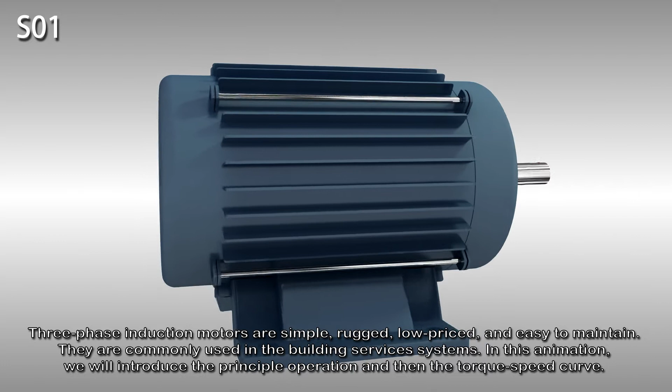Induction motor, principle of operation and the torque speed curve. Three-phase induction motors are simple, rugged, low-priced and easy to maintain. They are commonly used in building services systems. In this animation, we will introduce the principle of operation and then the torque speed curve.

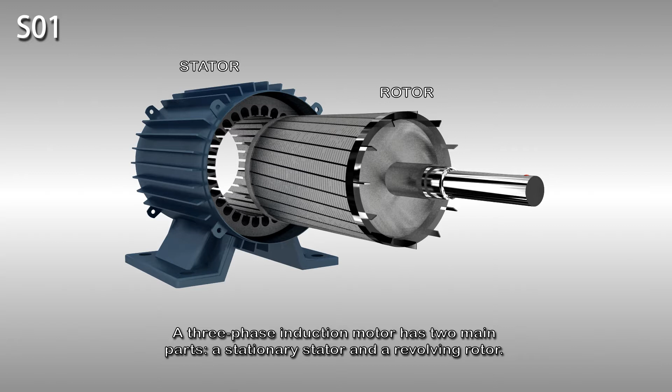A three-phase induction motor has two main parts, a stationary stator and a revolving rotor. The stator consists of a steel frame that supports a hollow cylindrical core made up of stacked laminations. A number of evenly spaced slots punched out of the internal circumference of the laminations provide the space for the stator winding. The rotor is also composed of punched laminations.

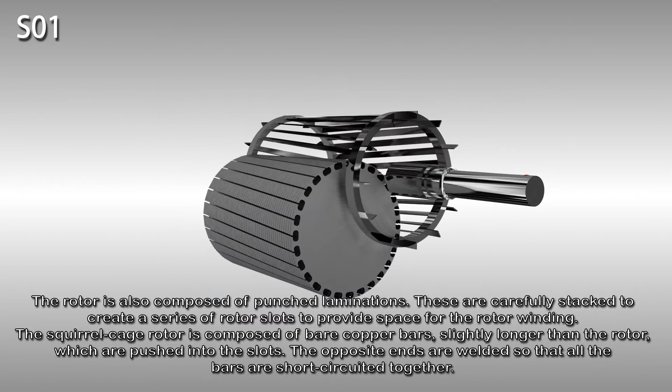These are carefully stacked to create a series of rotor slots that provide space for the rotor winding. The squirrel cage rotor is composed of bare copper bars, slightly longer than the rotor, which are pushed into the slots. The opposite ends are welded so that all the bars are short-circuited together. The entire construction resembles a squirrel cage, from which the name is derived.

When a three-phase AC current passes through the stator winding, it produces a magnetic field that rotates in time with the AC oscillations and penetrates the rotor. The rotor will start to rotate in the direction of the rotating stator magnetic field based upon the application of Faraday's law and the Lorentz force on a conductor.

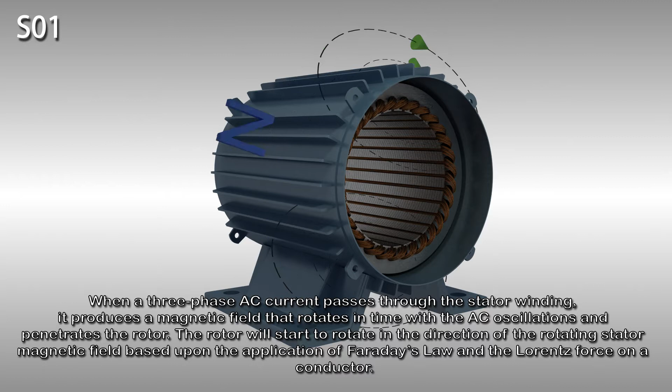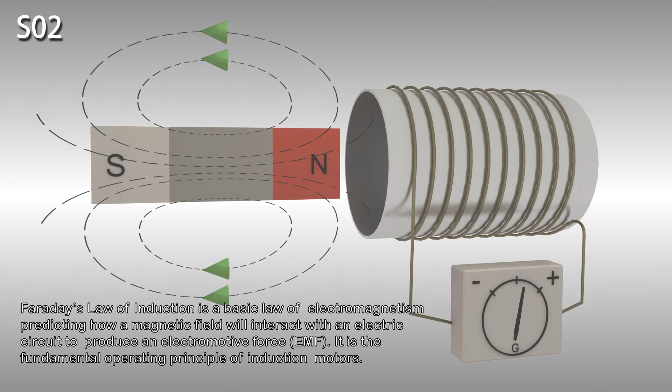Faraday's law of induction is a basic law of electromagnetism and predicts how a magnetic field will interact with an electric circuit to produce an electromotive force, or EMF. It is the fundamental operating principle of induction motors. In 1831, Michael Faraday discovered that any change in the magnetic environment of a coil of wire will cause an EMF to be induced in the coil.

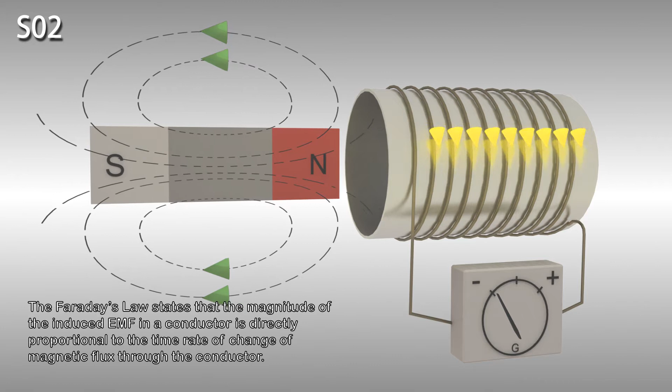Faraday's law states that the magnitude of the induced EMF in a conductor is directly proportional to the time rate of change of magnetic flux through the conductor. In other words, EMF is proportional to ΔΦ/Δt. Lenz's law is a qualitative law that refers to the direction of induced current in relation to the effect which produces it, without quantitatively relating their magnitudes. It states that the direction of the induced current will always oppose the inducing action of a moving magnet.

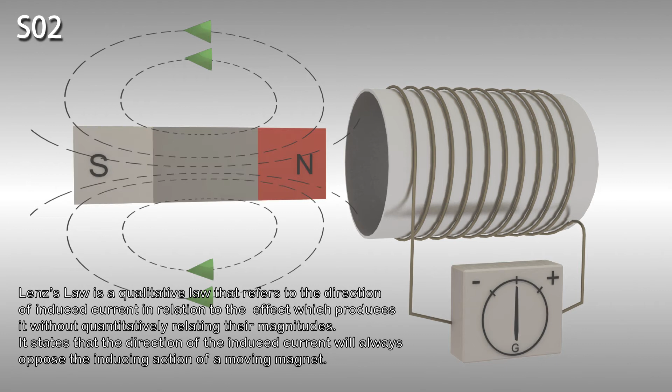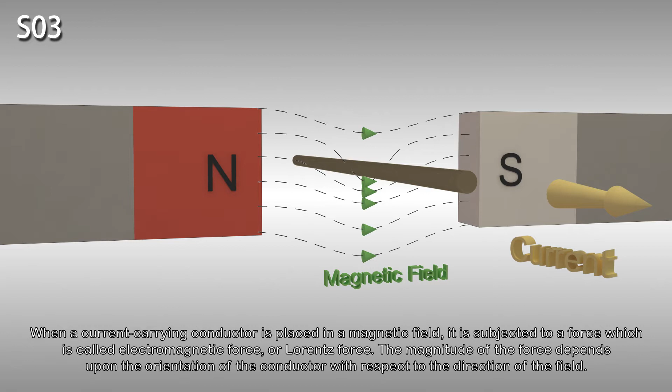When a current-carrying conductor is placed in a magnetic field, it is subjected to a force called the electromagnetic force, or Lorentz force. The magnitude of the force depends upon the orientation of the conductor with respect to the direction of the field. The force is greatest when the conductor is perpendicular to the field and zero when it is parallel to it. Between these two extremes, the force has intermediate values. The direction of the electromagnetic force can be illustrated by Fleming's left-hand rule.

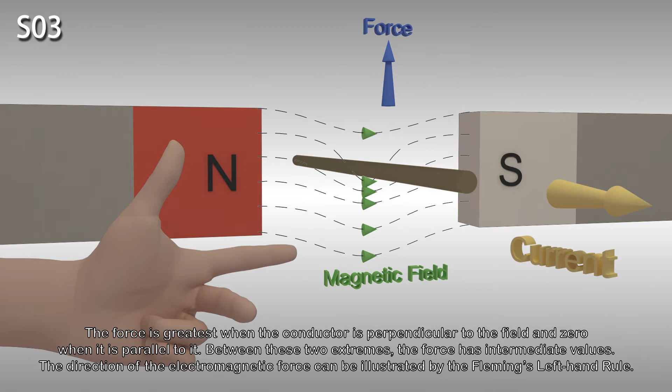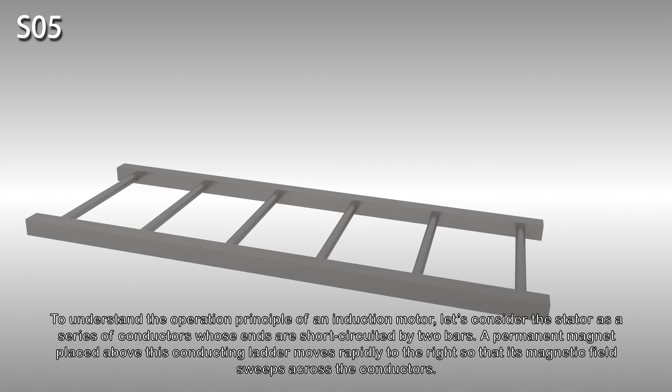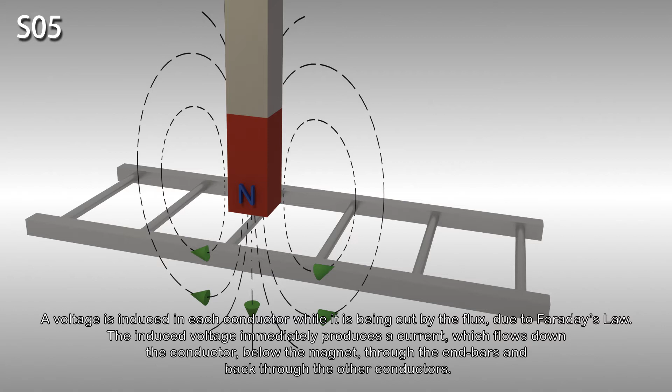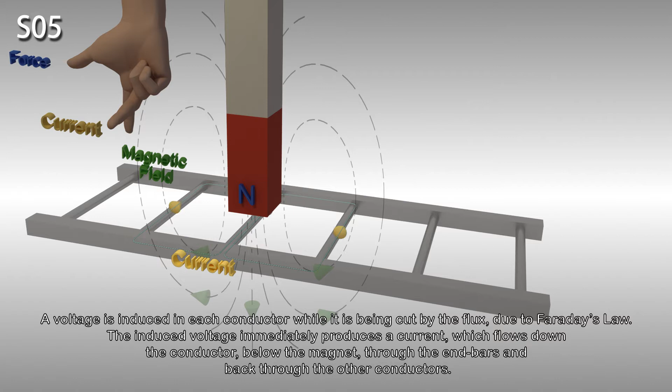To understand the operation principle of an induction motor, let's consider the stator as a series of conductors whose ends are short-circuited by two bars. A permanent magnet placed above this conducting ladder moves rapidly to the right so that its magnetic field sweeps across the conductors. A voltage is induced in each conductor while it is being cut by the flux due to Faraday's law. The induced voltage immediately produces a current which flows down the conductor, below the magnet, through the end bars and back through the other conductors.

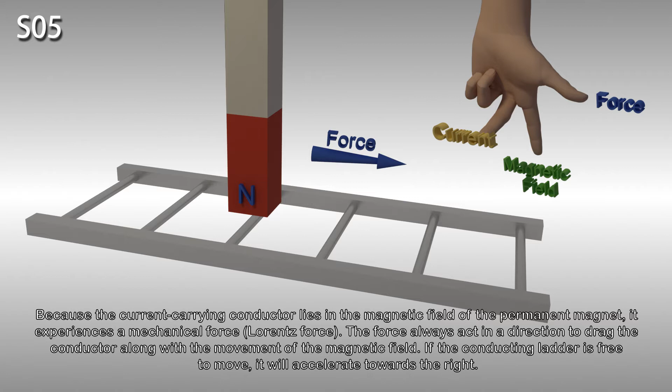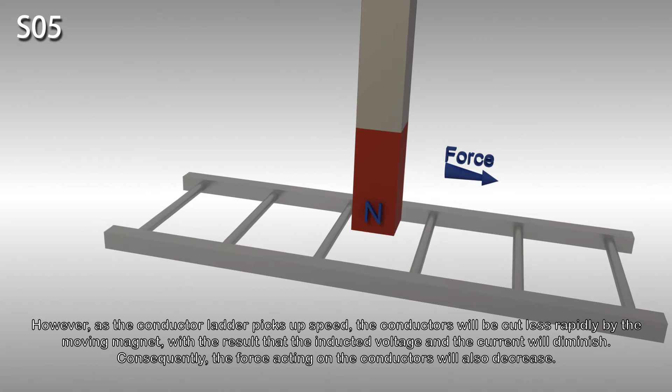Because the current-carrying conductor lies in the magnetic field of the permanent magnet, it experiences a mechanical force known as the Lorentz force. The force always acts in a direction to drag the conductor along with the movement of the magnetic field. If the conducting ladder is free to move, it will accelerate towards the right. However, as the conductor ladder picks up speed, the conductors will be cut less rapidly by the moving magnet, with the result that the induced voltage and the current will diminish. Consequently, the force acting on the conductors will also decrease.

In an induction motor, the ladder is curved to form a squirrel cage, and the moving magnet is replaced by a rotating field. The field is produced by the three-phase currents that flow in the stator windings.

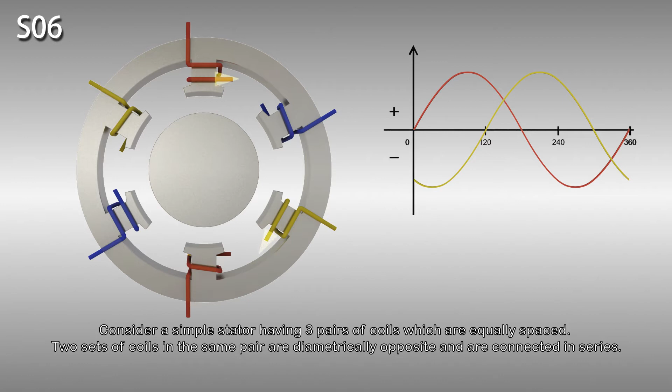The animation now explains the rotating stator magnetic field. Consider a simple stator having three pairs of coils which are equally spaced. Two sets of coils in the same pair are diametrically opposite and are connected in series. This creates three identical sets of windings that are mechanically spaced at 120 degrees relative to each other.

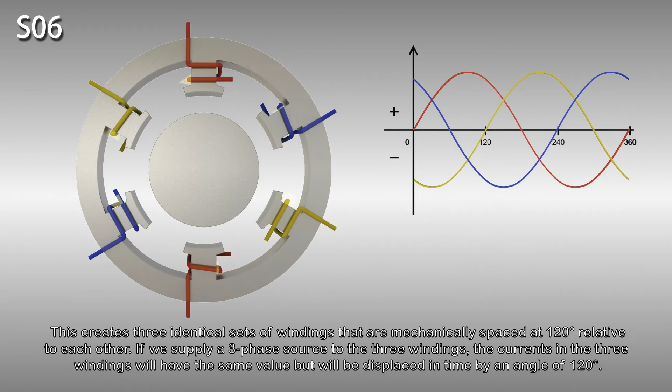If we supply a three-phase source to the three windings, the currents in the three windings will have the same value, but will be displaced in time by an angle of 120 degrees. During the positive half cycle of the R phase, the current will flow in this direction along these two windings. According to the right-hand rule, the magnetic flux is in the direction shown, creating north and south poles.

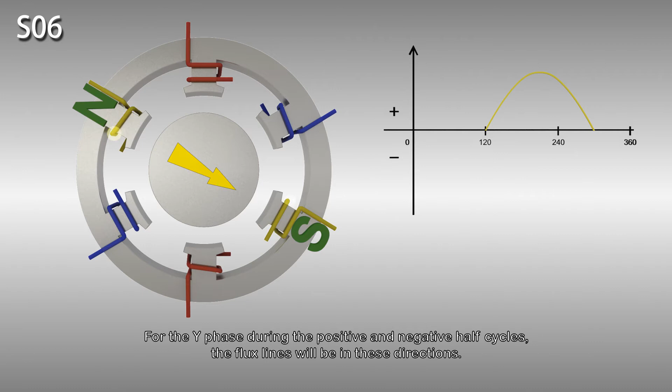In the negative half cycle, current will be flowing in the opposite direction. Therefore, the flux lines will also be in the opposite direction. For the Y phase during the positive and negative half cycles, the flux lines will be in these directions. For the B phase during the positive and negative half cycles, the flux lines will be in these directions.

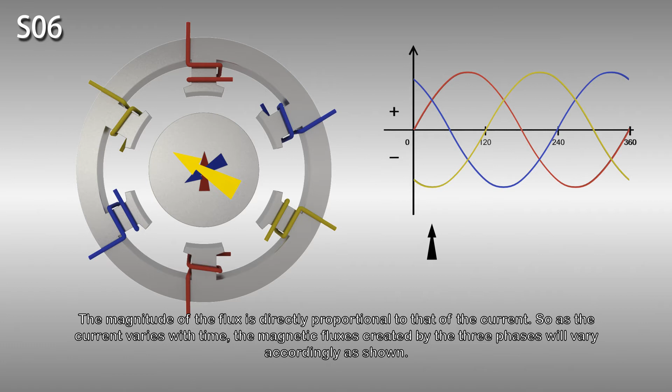The magnitude of the flux is directly proportional to that of the current. As the current varies with time, the magnetic fluxes created by the three phases will vary accordingly as shown. As flux lines can't cross each other, the three fluxes combine and produce a magnetic field having essentially one broad north pole and one broad south pole. This means this stator produces a two-pole field.

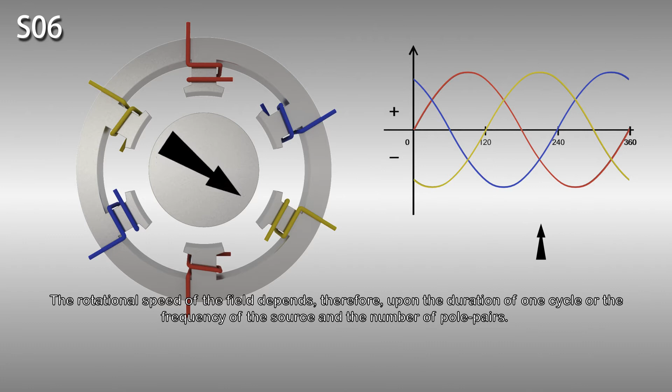The magnetic field rotates with time and makes one complete turn in one cycle of current flow. The rotational speed of the field depends therefore upon the duration of one cycle or the frequency of the source and the number of pole pairs. Because the speed of the rotating field is necessarily synchronized with the frequency of the source, it is called synchronous speed. If the frequency is 50 Hz, the resulting field makes one turn in 1/50th of a second, that is 3000 revolutions per minute. The synchronous speed can be reduced by increasing the number of pole pairs.

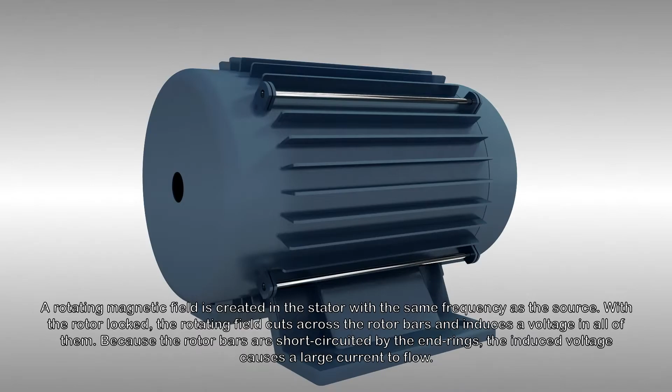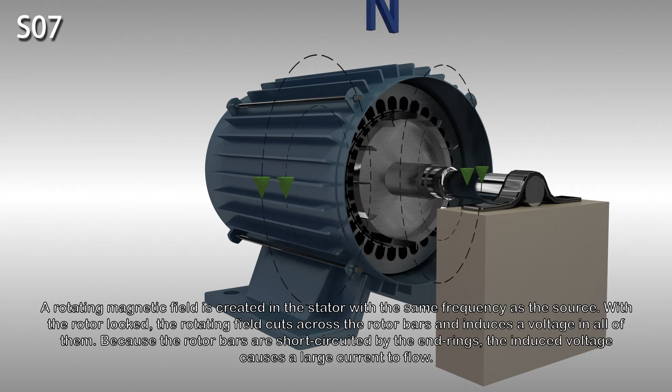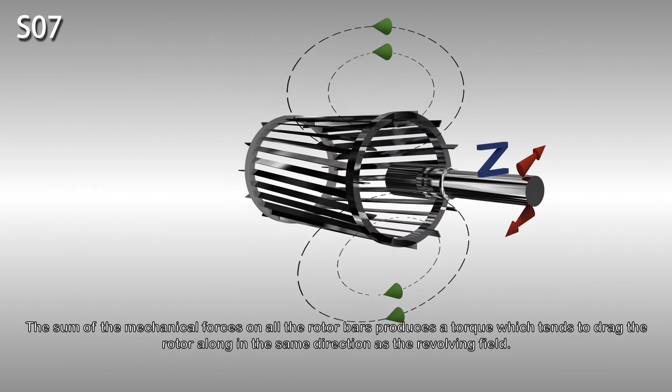A rotating magnetic field is created in the stator with the same frequency as the source. With the rotor locked, the rotating field cuts across the rotor bars and induces a voltage in all of them. Because the rotor bars are short-circuited by the end-rings, the induced voltage causes a large current to flow. The current-carrying conductors are in the path of the flux created by the stator. Consequently, they all experience a strong mechanical force. The sum of the mechanical forces on all the rotor bars produces a torque which tends to drag the rotor along in the same direction as the revolving field.

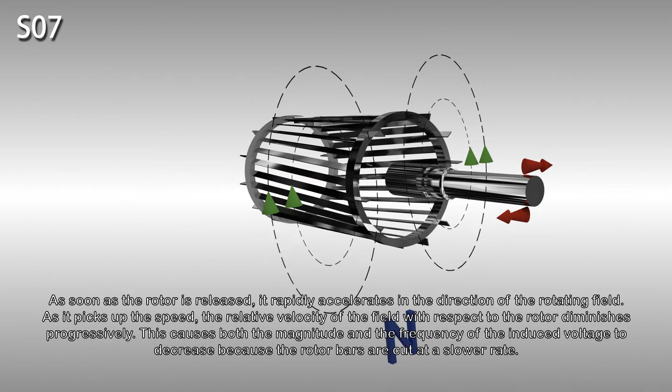As soon as the rotor is released, it rapidly accelerates in the direction of the rotating field. As it picks up speed, the relative velocity of the field with respect to the rotor diminishes progressively. This causes both the magnitude and the frequency of the induced voltage to decrease because the rotor bars are cut at a slower rate. As the rotor speeds up, it never manages to catch up with the revolving field.

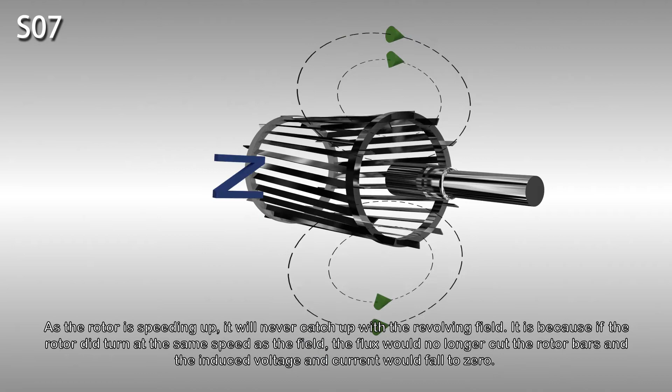If the rotor did turn at the same speed as the field, the flux would no longer cut the rotor bars and the induced voltage and current would fall to zero. Under these conditions, the force acting on the rotor bars would also become zero, and friction and windage would immediately cause the rotor to slow down. The rotor speed is always slightly less than the synchronous speed in order to produce a current in the rotor bars sufficiently large enough to overcome the braking torque. The difference between the synchronous speed and the rotor speed, expressed as a percentage of synchronous speed, is called the slip S.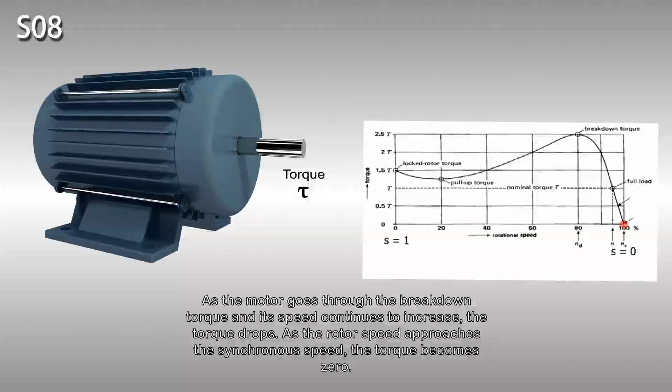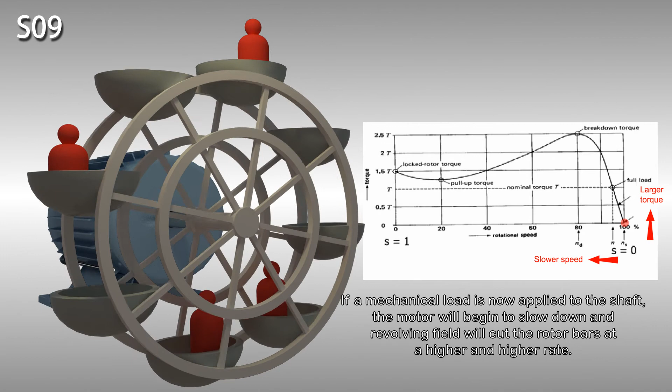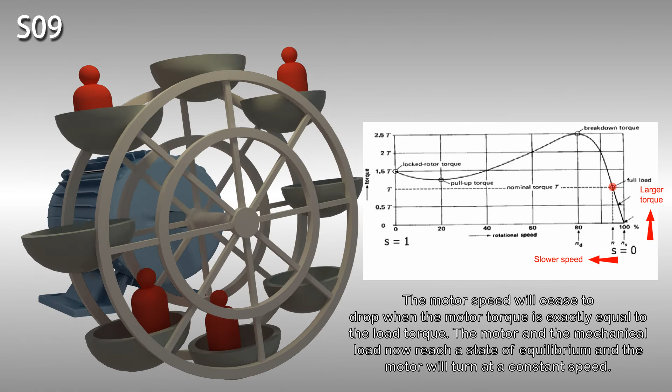If a mechanical load is now applied to the shaft, the motor will begin to slow down and the revolving field will cut the rotor bars at a higher and higher rate. The induced voltage and the resulting current in the rotor bars will increase progressively, producing a greater and greater motor torque. The motor speed will cease to drop when the motor torque is exactly equal to the load torque. The motor and the mechanical load now reach a state of equilibrium and the motor will turn at a constant speed.

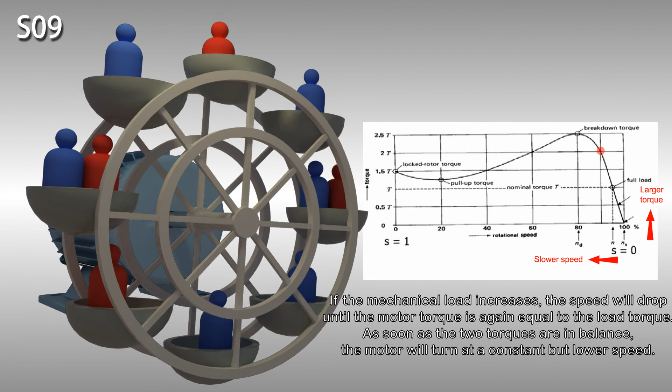If the mechanical load increases, the speed will drop until the motor torque is again equal to the load torque. As soon as the two torques are in balance, the motor will turn at a constant but lower speed. However, if the load torque exceeds the breakdown torque, the motor will quickly stop.

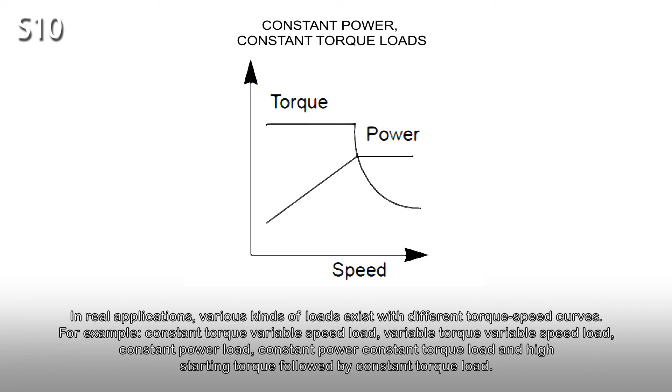In real applications, various kinds of loads exist with different torque-speed curves. For example, constant torque variable speed load, variable torque variable speed load, constant power load, constant power constant torque load, and high starting torque followed by constant torque load.

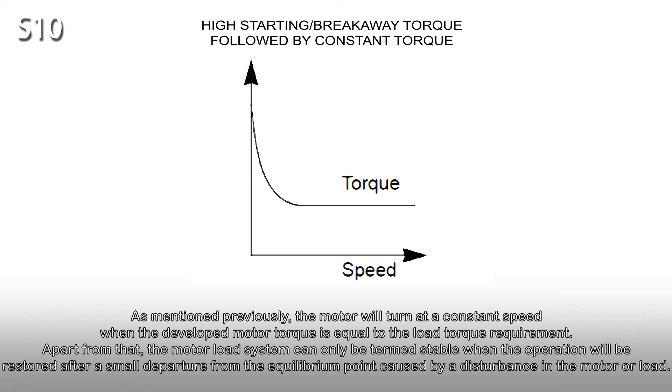As mentioned previously, the motor will turn at a constant speed when the developed motor torque is equal to the load torque requirement. Apart from that, the motor load system can only be termed stable when the operation will be restored after a small departure from the equilibrium point caused by a disturbance in the motor or load.

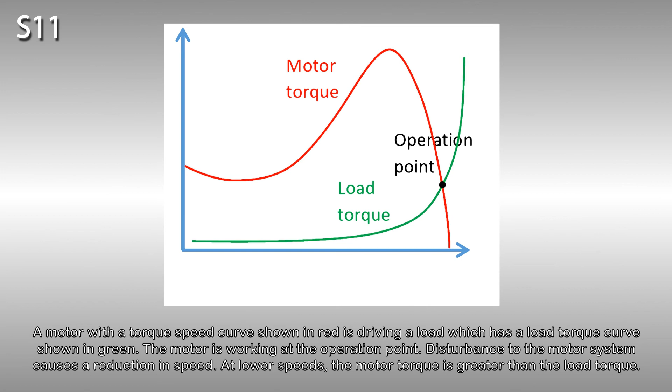A motor with a torque-speed curve shown in red is driving a load which has a load torque curve shown in green. The motor is working at the operation point. Disturbance to the motor system causes a reduction in speed. At lower speeds, the motor torque is greater than the load torque. Consequently, the motor will accelerate and the operation will be restored to the operation point.

Similarly, an increase in speed caused by disturbance will make the load torque greater than the motor torque, resulting in a deceleration and restoration of the operation point. Hence, the system is stable.

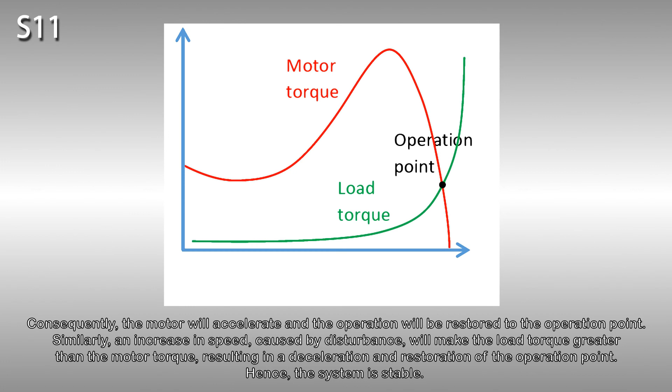A suitable motor should be selected for driving the given load. Various standards exist which specify various operating and constructional parameters of motors. One of the most widely used standards are those of the National Electrical Manufacturers Association, or NEMA. The NEMA standards mainly specify 4 design types of AC induction motors, designs A, B, C and D.

Design A has normal starting torque and relatively high starting current. The breakdown torque is the highest of all the NEMA types. It can handle heavy overloads for a short duration. A typical application is the powering of injection molding machines.

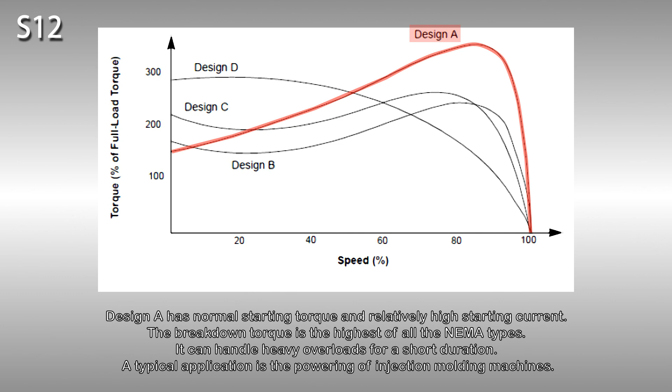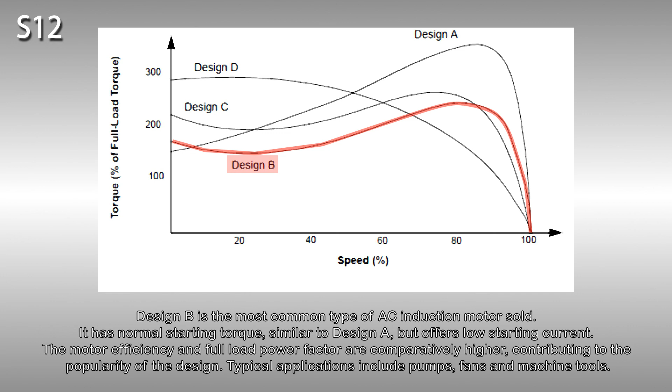Design B is the most common type of AC induction motor sold. It has normal starting torque, similar to Design A, but offers low starting current. The motor efficiency and full load power factor are comparatively higher, contributing to the popularity of the design. Typical applications include pumps, fans, and machine tools.

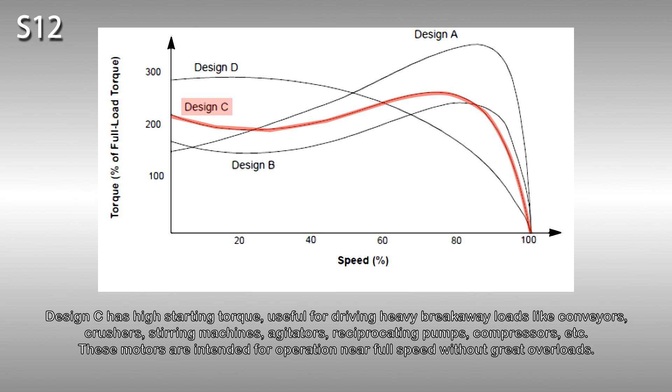Design C has high starting torque, useful for driving heavy breakaway loads like conveyors, crushers, stirring machines, agitators, reciprocating pumps, compressors, etc. These motors are intended for operation near full speed without great overloads.

Design D has high starting torque, higher than the other NEMA motor types. The starting current and full load speed are low. These motors are suitable for applications with changing loads and subsequent sharp changes in motor speed. The speed regulation is poor, making the design suitable only for punch presses, cranes, elevators and oil well pumps.